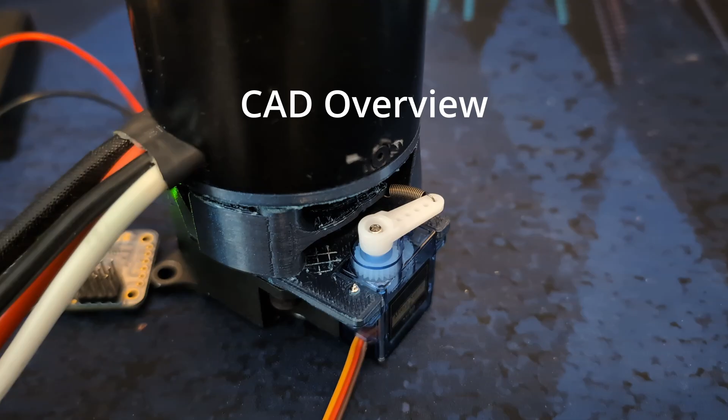Got a MAXPlanetary here and a Neo on top. Look at the top, you can see how the ratchet works. So when it's down all the way, the spring is compressed, right, and then the pawl is out of the way of the ratchet, so the ratchet can spin freely. Now, when we close it, the spring's still compressed. It's pushing this in, right?

It's pulling on this and pushing the ratchet in. So it can't spin one way, and it can spin the other way. All the force is going through directly here, directly through that line. So all the force is on one of the mounting bolts.

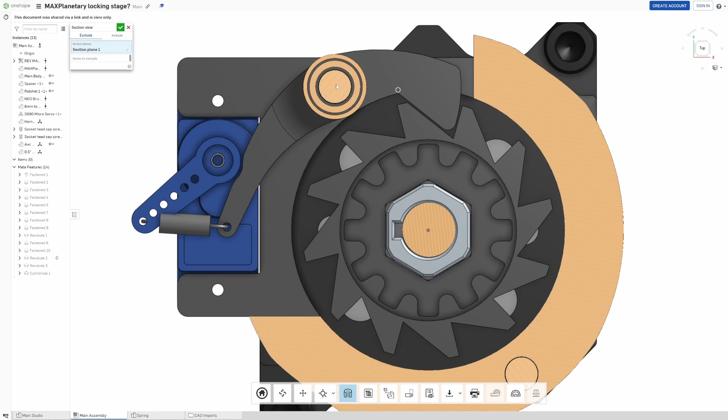Okay, so I'll now go into how you assemble it. So start with the motor, obviously. You can use pretty much any motor. A Vortex, you just put a hex shaft through. Kraken, I don't think you can use a Kraken because you don't have an 8mm to 1/2" hex adapter for a Kraken yet. But this is offered for a Falcon, so you could use this in a Falcon.

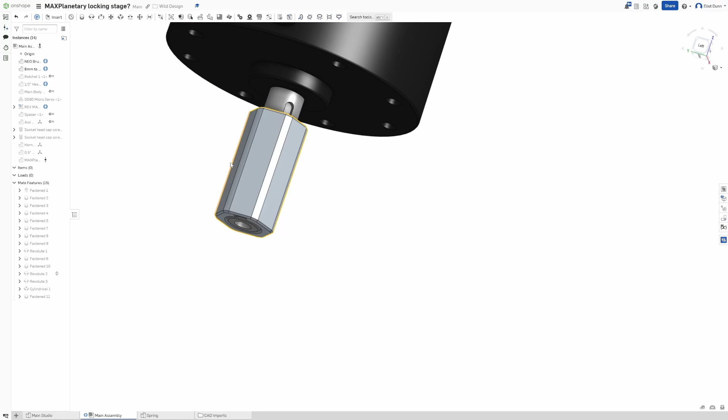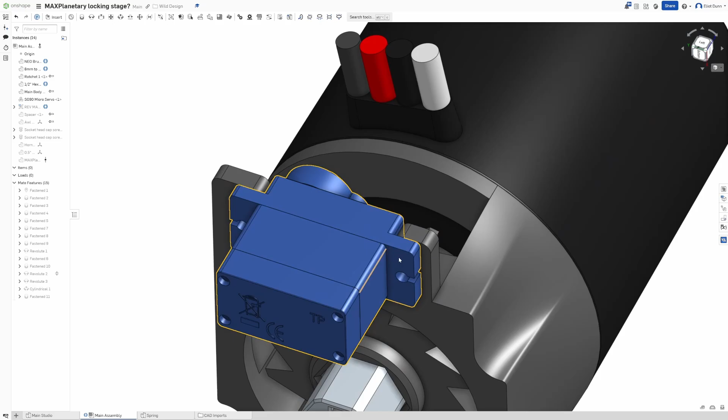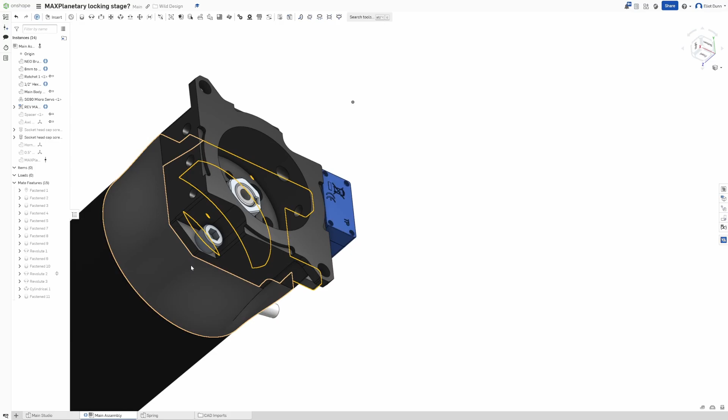Right, so then you have the motor assembly and this assembly separate. Then what you do is you get the input stage of a MAXPlanetary, and you want to put the first bolt through. Right, so this bolt to the Neo. Don't do it too tight yet because you want to put the other bolt through next. So you put the spacer and the axle together, and you put them in. Then you just put the bolt through. So that's nice and simple.

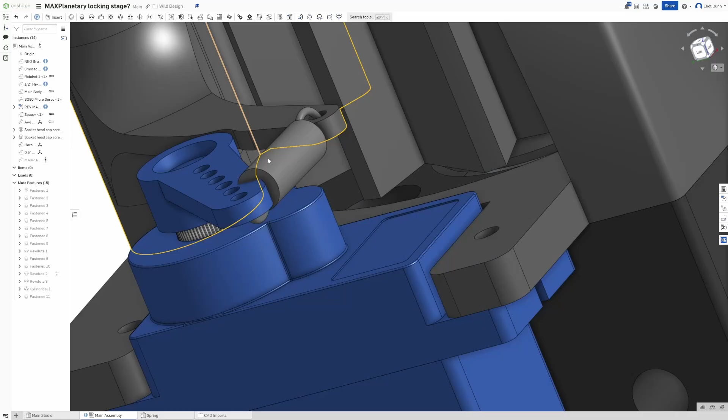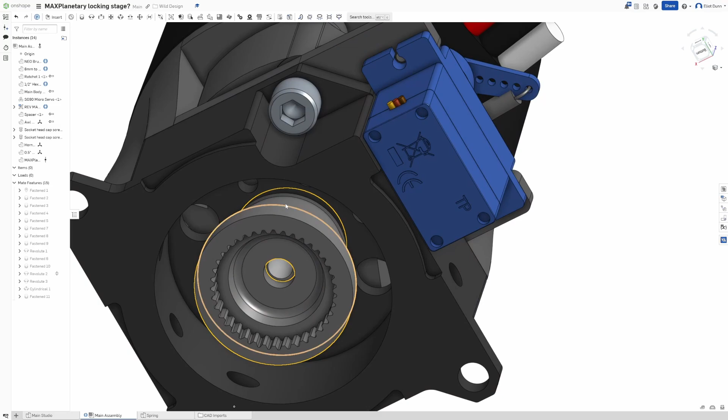Then pretty much the second last step, you put the horn and the spring on. First you want to find wherever you want your home position for the servo to be and have it commanded via PWM to go there, and then you put the horn in with the spring, and you should bolt it down with whatever bolts it comes with. Right, and then the last step, you put in the 1/2" hex to MAXPlanetary input adapter, and then you bolt this onto the rest of your MAXPlanetary.